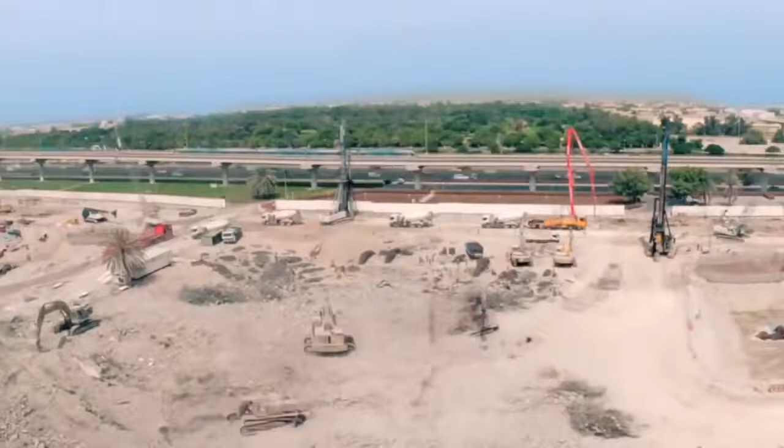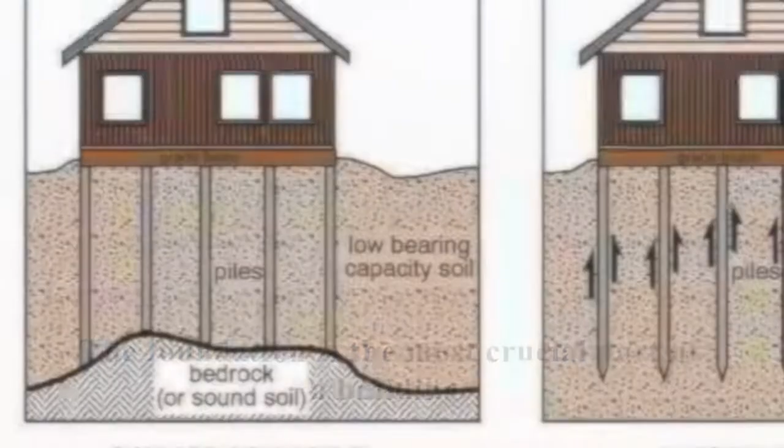The foundation is the most crucial part of a building. This structure determines the stability and safety of the building. In this video, bored cast in situ pile foundation is used.

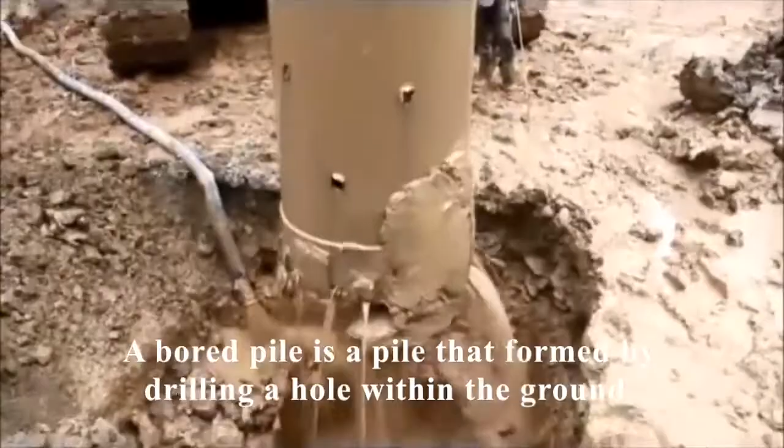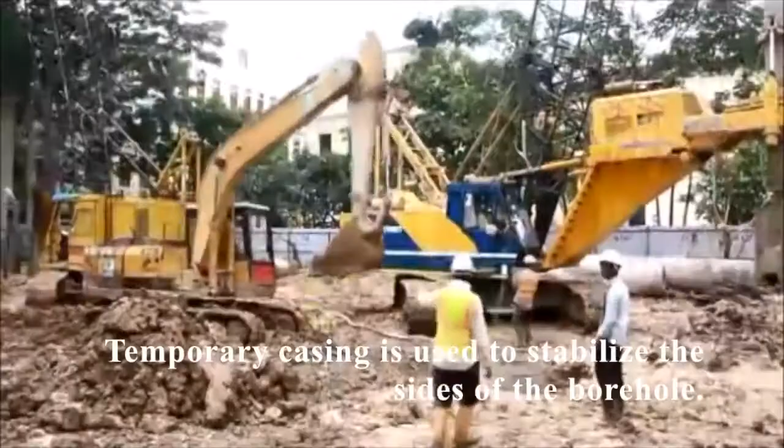A bored pile is a pile that is formed by drilling a hole in the ground with the use of a temporary casing and subsequently filling it with cast in situ concrete. The temporary casing is used to stabilize the sides of the borehole, and the casing is withdrawn once concreting is complete.

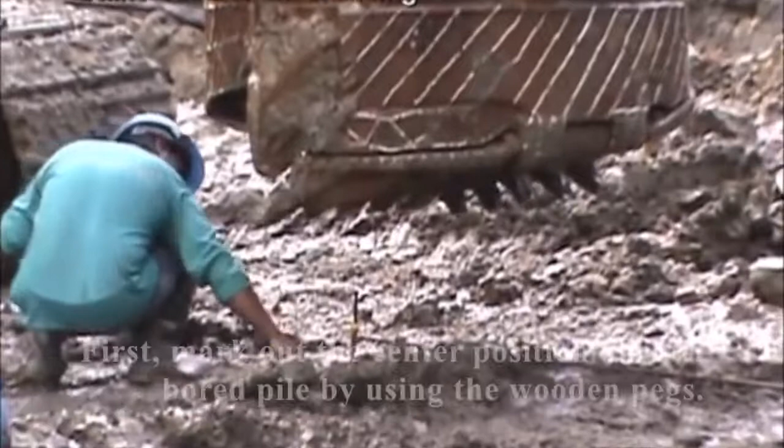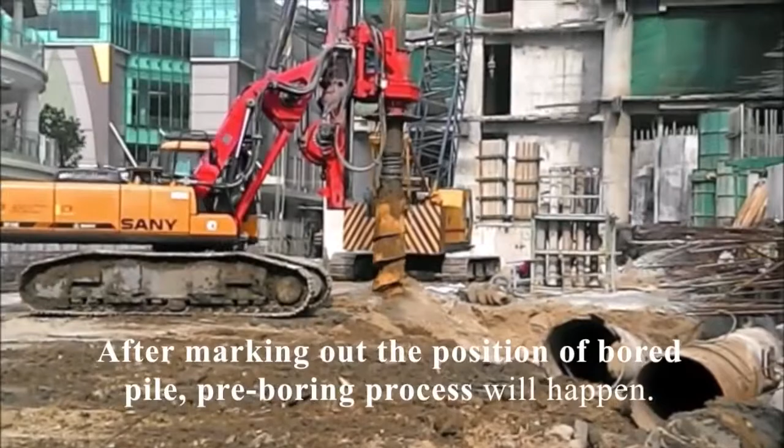Step 1. First, mark out the center position of each bored pile by using wooden pegs. Stage 2 is the pre-boring stage. After marking out the position of the bored pile, the pre-boring process will occur. In this video, we can see that an auger is being used in the pre-boring process.

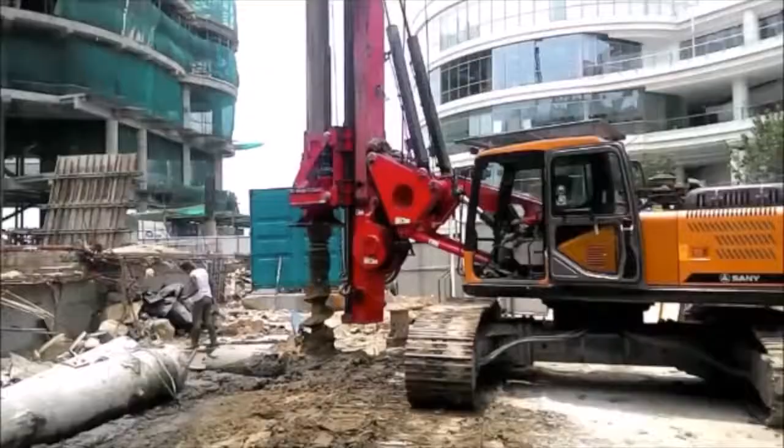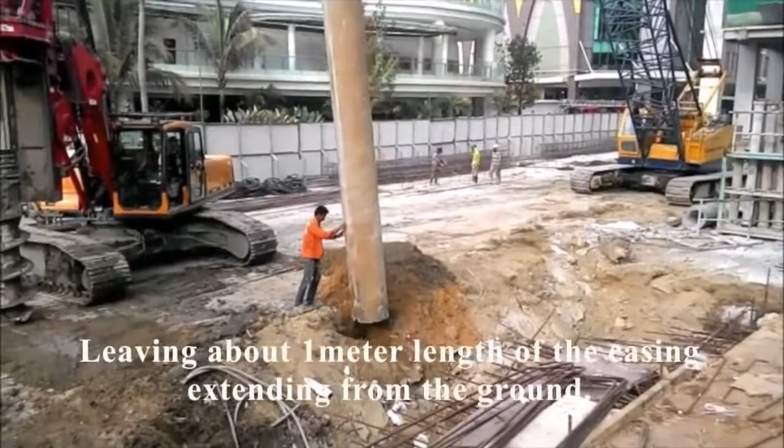Step 3 is the installation of temporary casing stage. The temporary casing will be driven into the borehole by using the vibratory hammer, leaving about 1 meter length of the casing extending from the ground.

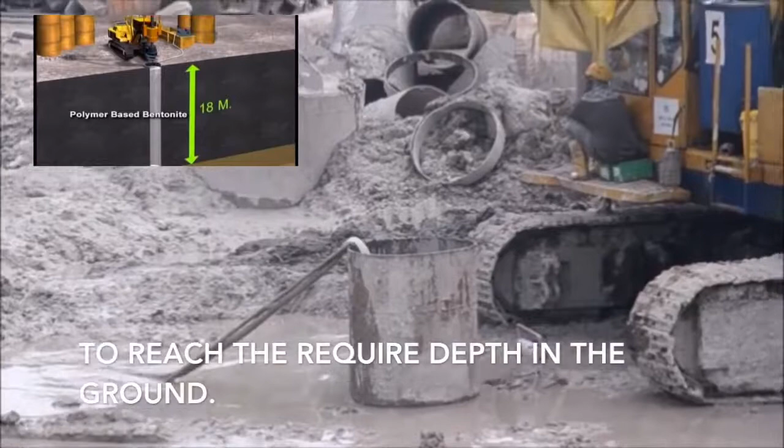In this video, we can see that the workers are cutting the extra casing. In some cases, the casing is not long enough to reach the required depth in the ground, so bentonite slurry is used to support the soil below the casing.

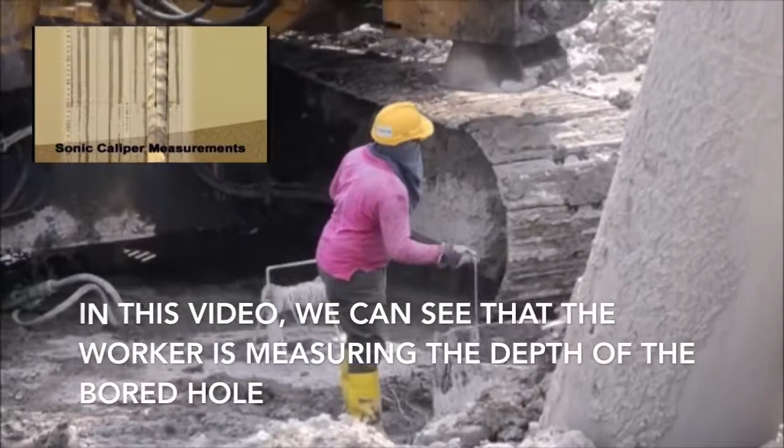In this video, we can see that the worker is measuring the depth of the borehole by using sonic caliper measurement.

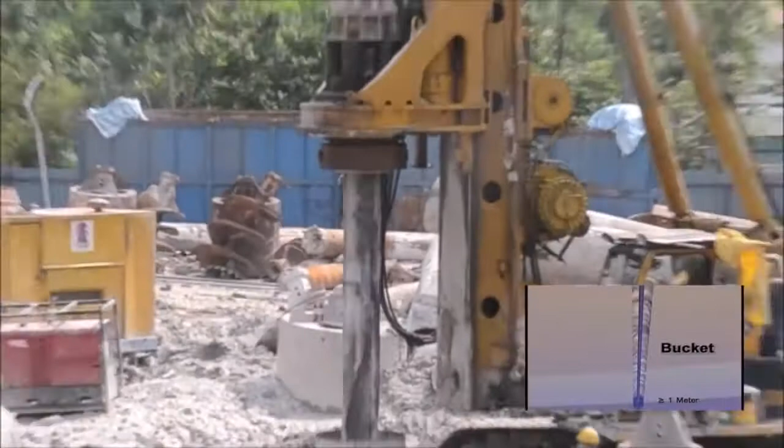Stage 4 is the installation of the reinforcement cage, where a crane will be used to lift up the prefabricated reinforcement cage from the reinforcement yard, and it will be transferred to the borehole. The crane will lower and place the reinforcement cage within the borehole.

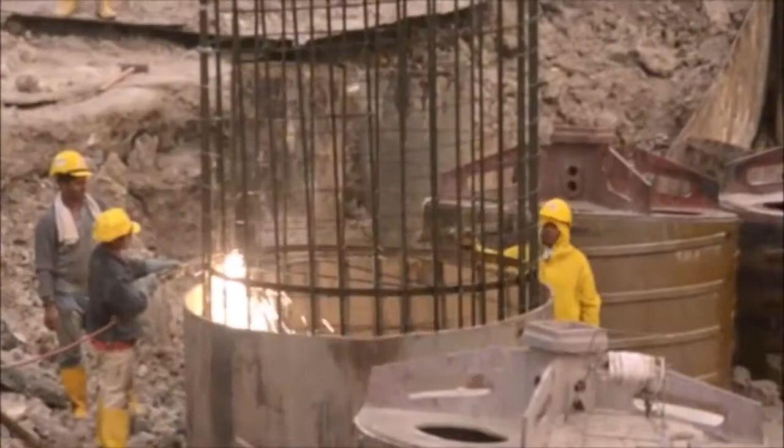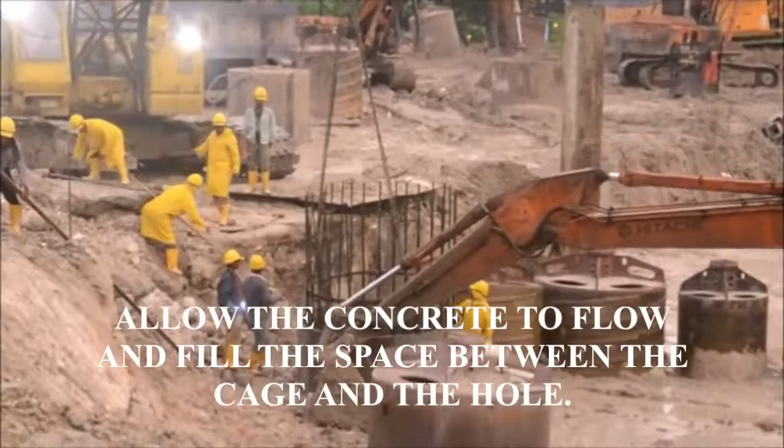Spacers can be seen around the reinforcement cage. This is to allow the concrete to flow and fill the space between the cage and the hole. When the concrete has reached the top of the borehole, the tremie pipe will be withdrawn completely.

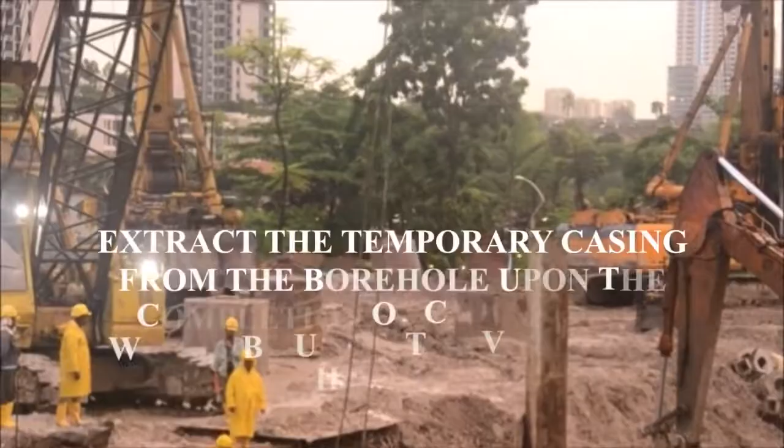Step 6 is the extraction of the temporary casing. Extract the temporary casing from the borehole upon the completion of concreting work by using the vibratory hammer. Also ensure that the temporary casing is extracted vertically.

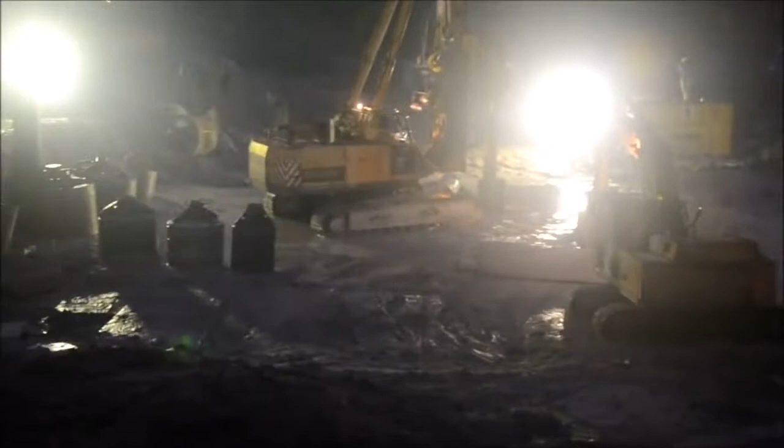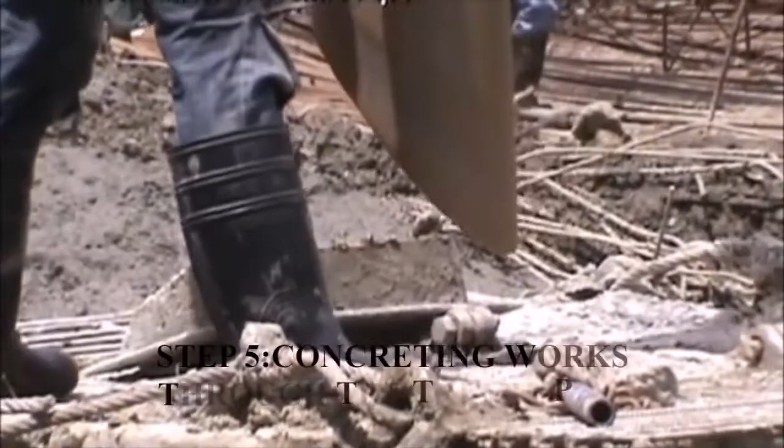While waiting for the concrete truck to arrive, the excavator will make a pathway for the truck to enter. Step 5 is the concrete work through the tremie pipe. After placing the rebar cage, insert the tremie pipe to the toe of the borehole.

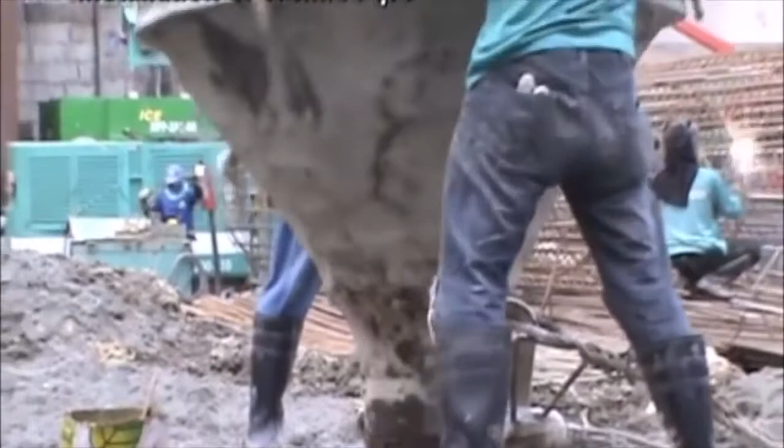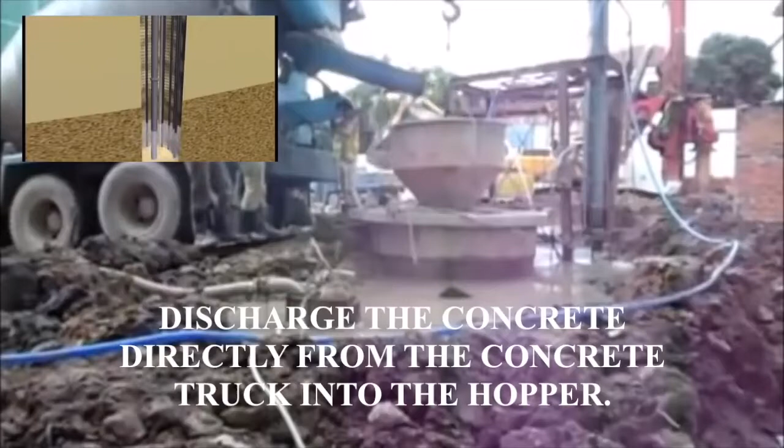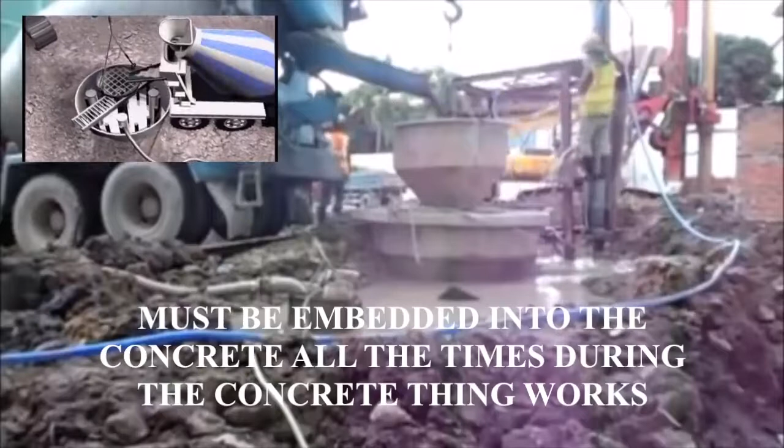Then discharge the concrete directly from the concrete truck into the hopper. Later on, fill the concrete from the bottom of the borehole to the top to form the bored pile. To prevent necking of the bored pile, the tremie pipe must be embedded into the concrete at all times during the concreting work.

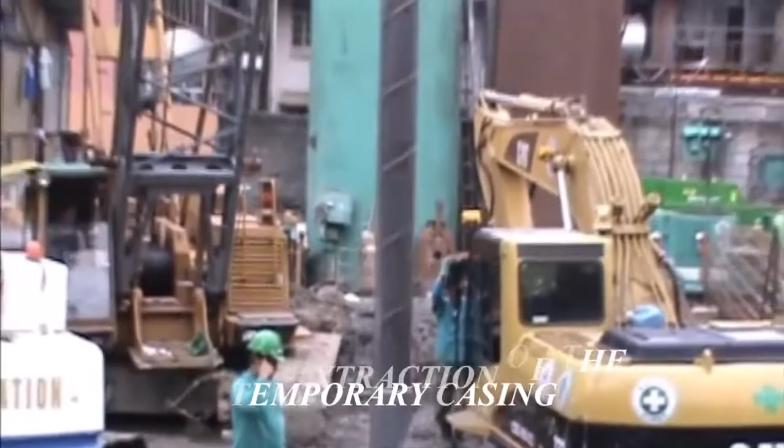Step 6 is the extraction of the temporary casing. Extract the temporary casing from the borehole upon the completion of concreting work by using the vibratory hammer. Also ensure that the temporary casing is extracted vertically.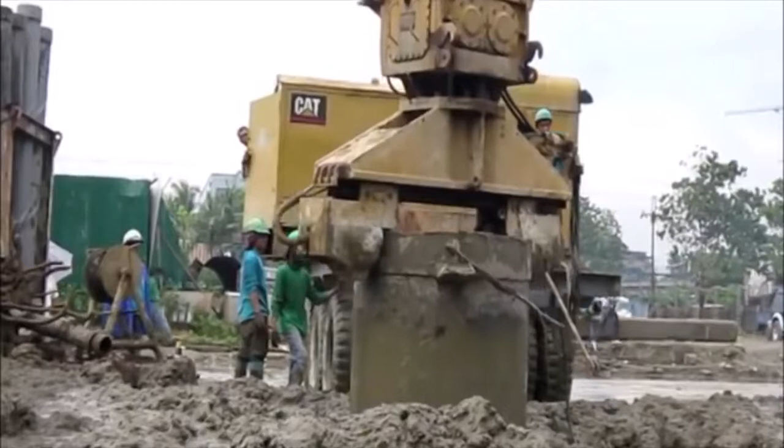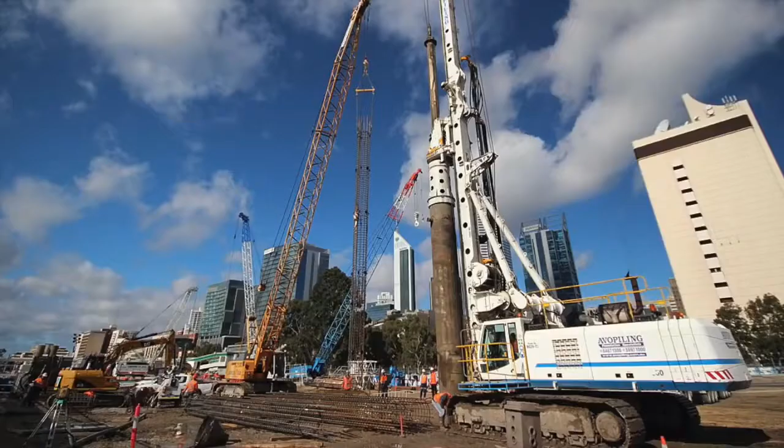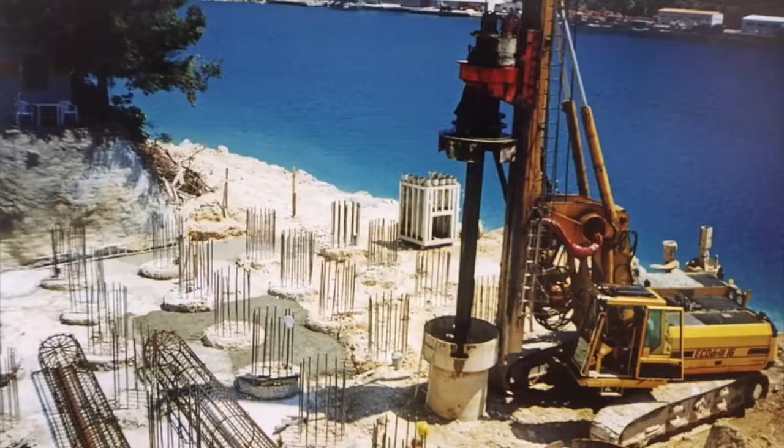There are several advantages to constructing a bored cast in situ pile. It can be constructed immediately, thus cutting out the time required for casting, maturing, and delivering precast piles. Any size and length of pile can be constructed at the site. Most obstructions can be hammered and broken through by the pile driving techniques.

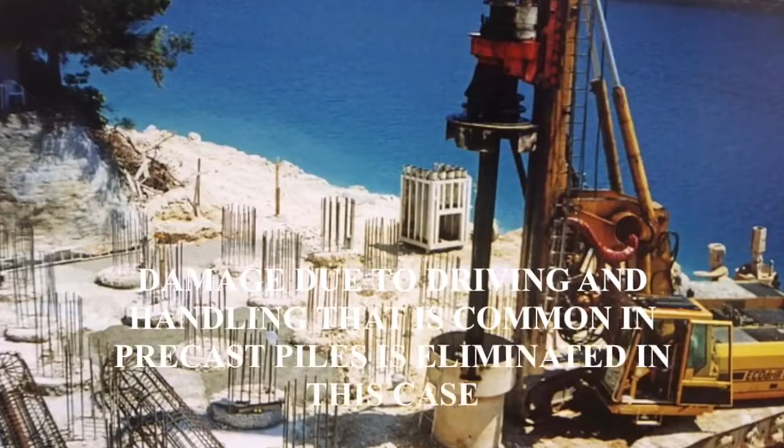Damage due to driving and handling that is common in precast piles is eliminated in this case. It is suitable in soils of poor drainage qualities, since cast in situ piles do not significantly disturb the surrounding soil.

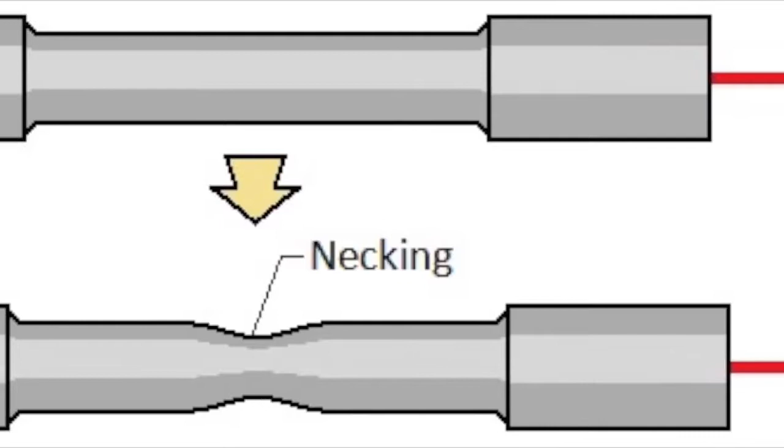On the other hand, the disadvantages of bored cast in situ piles are: it can be difficult to place and ensure positioning of any necessary reinforcement. The concrete quality control is more difficult. Moreover, there is a danger of necking from lateral earth pressure.

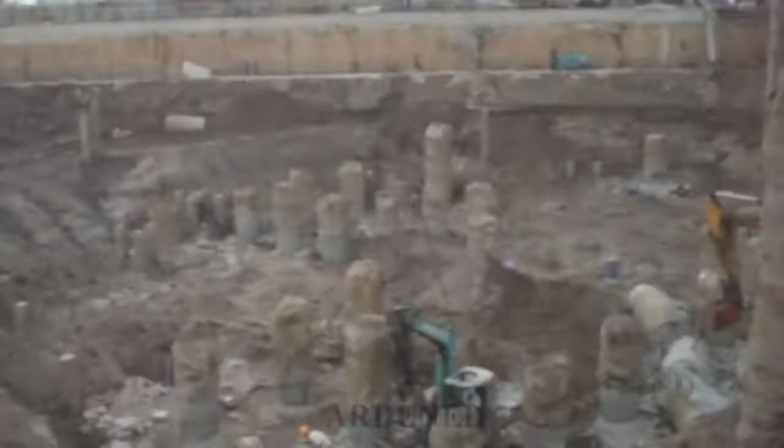Young concrete is susceptible to attack from some soil chemicals before it has set and hardened. Lastly, the construction of piles in holes where there are heavy currents of groundwater flow or artesian pressure is very difficult.

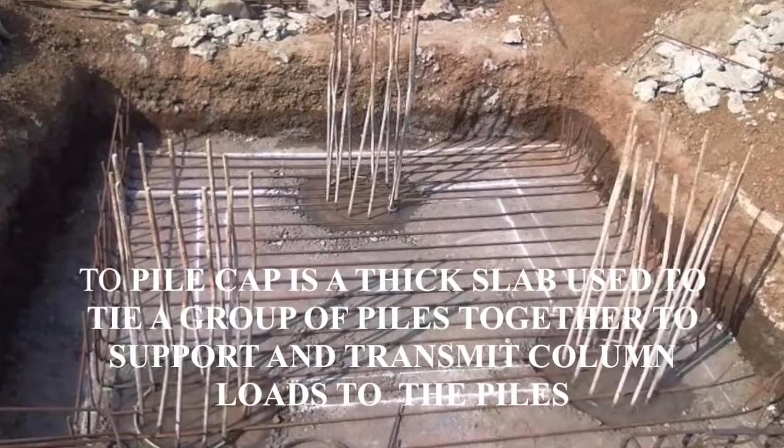After the piling process has been performed, the pile cap will be built on it. A pile cap is a thick slab used to tie a group of piles together to support and transmit column loads to the piles. Besides, the pile cap can stabilize individual piles, thus increasing overall stability of the group.

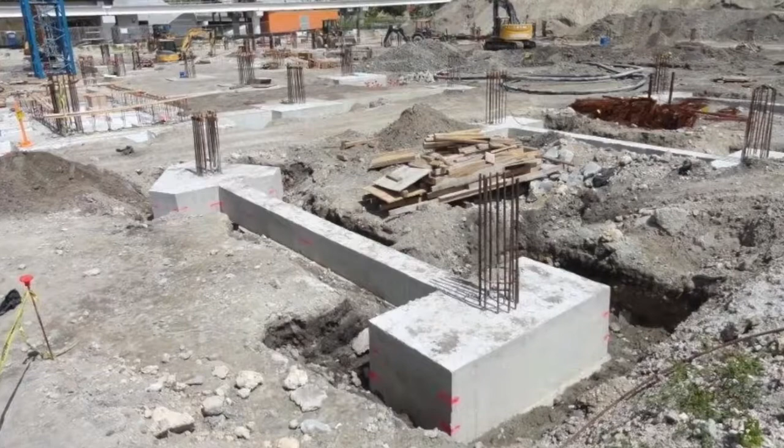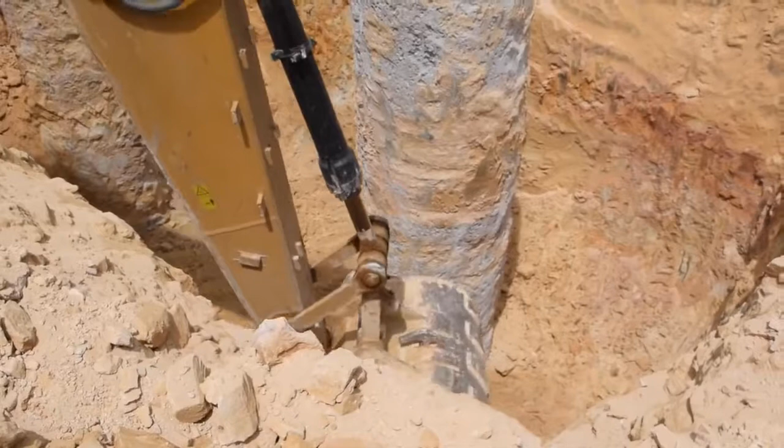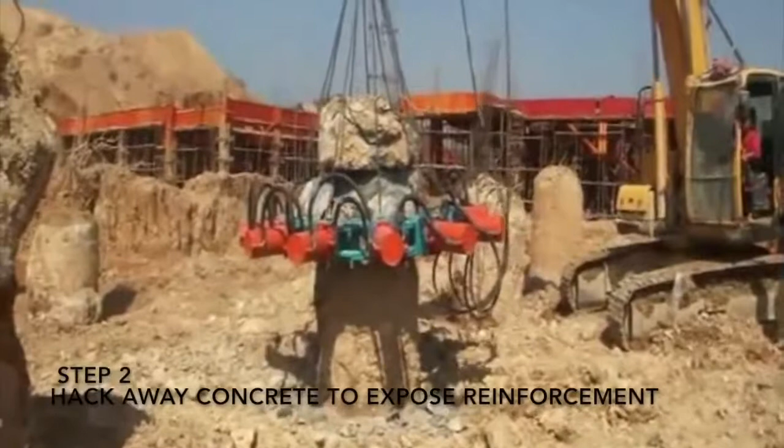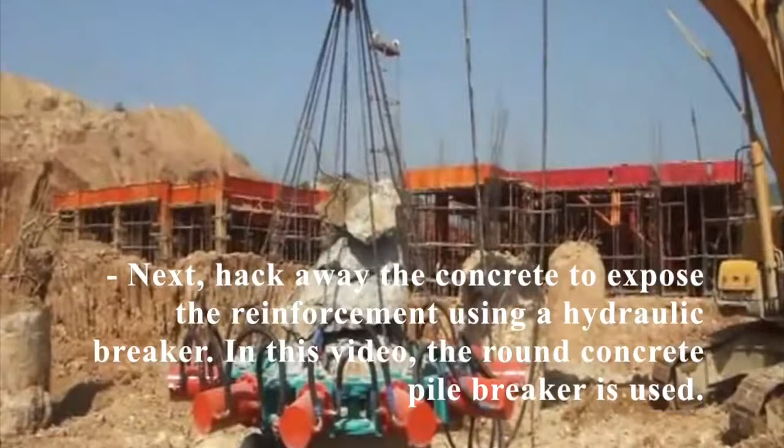First, an excavator is used to excavate the soil around the piles to level the pile cap base. Next, hack away the concrete to expose the reinforcement using a hydraulic breaker. In this video, the round concrete pile breaker is used.

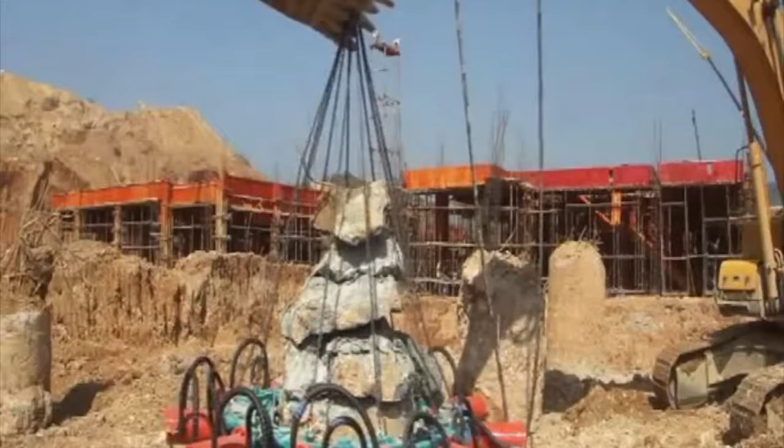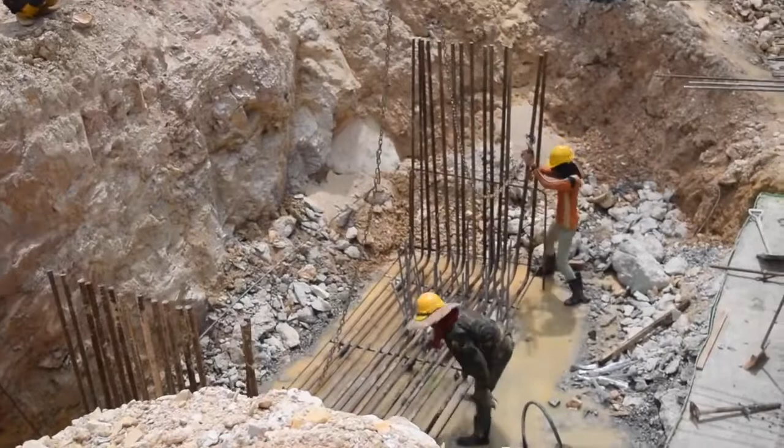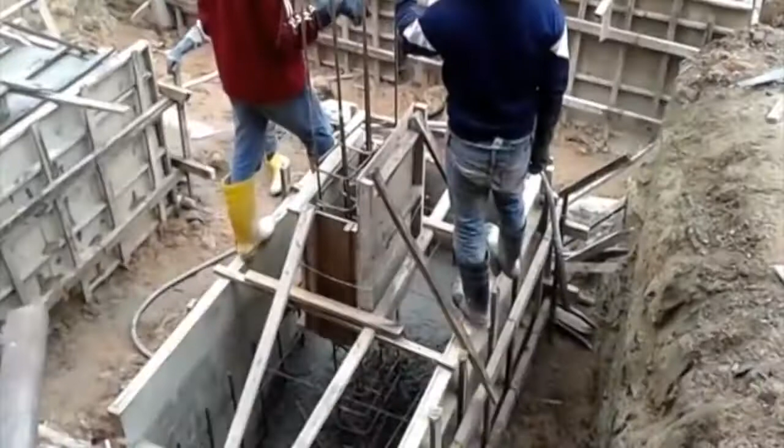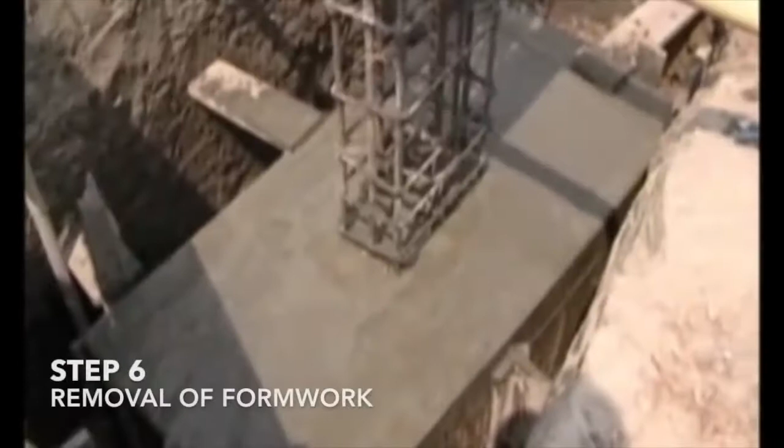After that, place the reinforcement bars of the pile cap onto the hacked bored piles. Formwork is then installed to cast the pile cap. Next, the concrete is poured inside the formwork. After the concrete is hardened, the formwork is removed. Finally, the pile foundation is done.

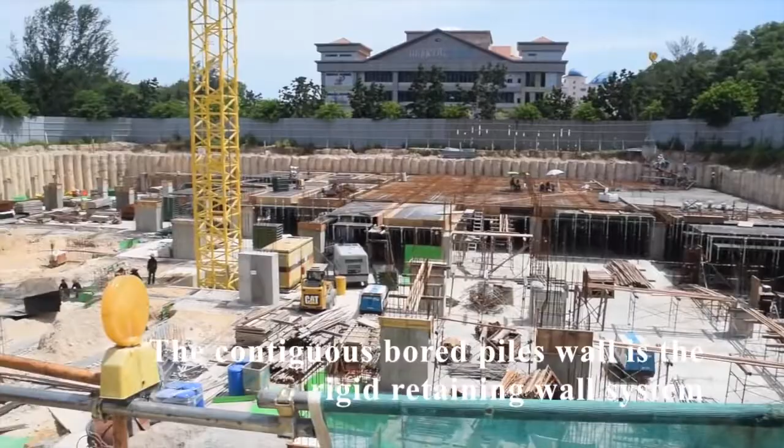Do you know that bored piles can not only be used as piling in pile foundations, but can also be built as a retaining wall, which is the contiguous bored pile wall. The contiguous bored pile wall is a rigid retaining wall system. It can act as a temporary earth retaining wall during excavation and can also be used as the permanent basement wall of the building.

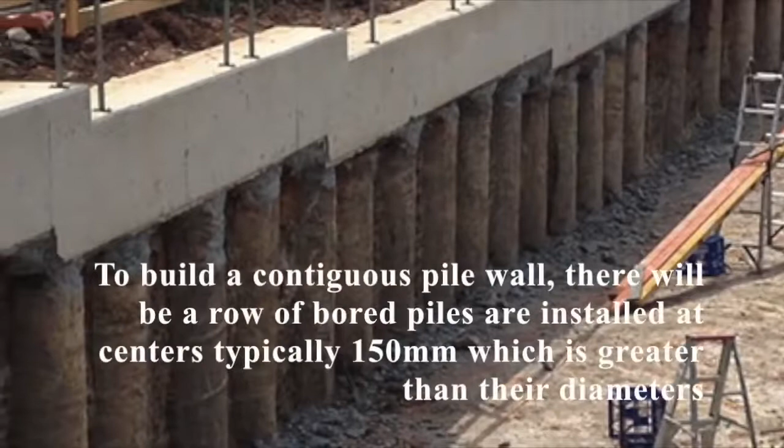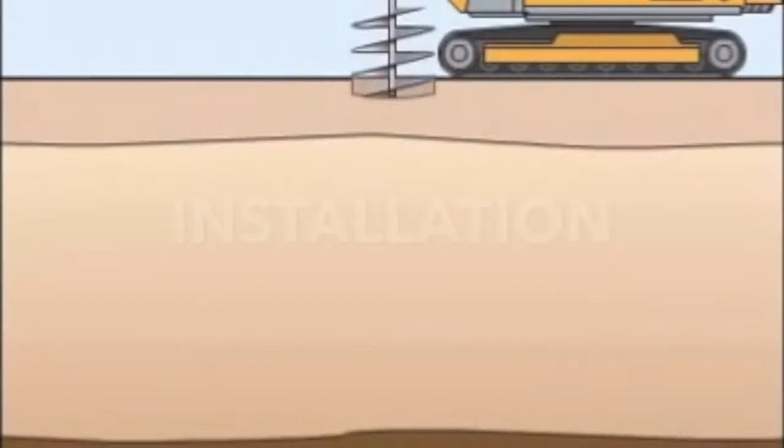To build a contiguous pile wall, a row of bored piles is installed at centers typically 150 mm greater than their diameters. The installation process of the contiguous bored pile wall is to repeat steps 1 to 6 from the installation of the bored cast in situ pile until the entire length of the contiguous bored pile wall construction is completed.

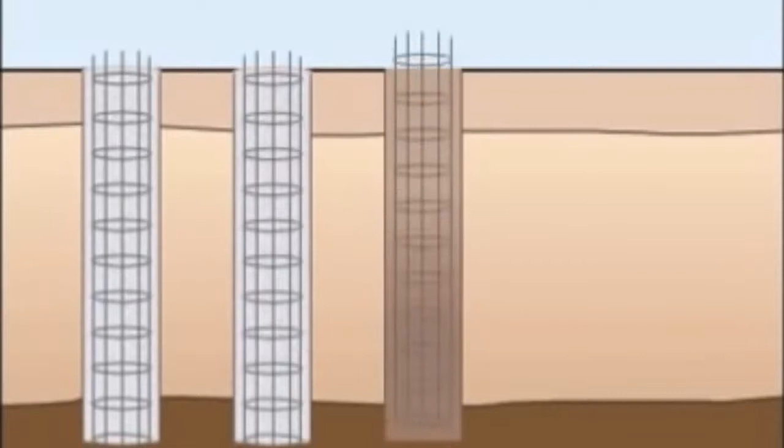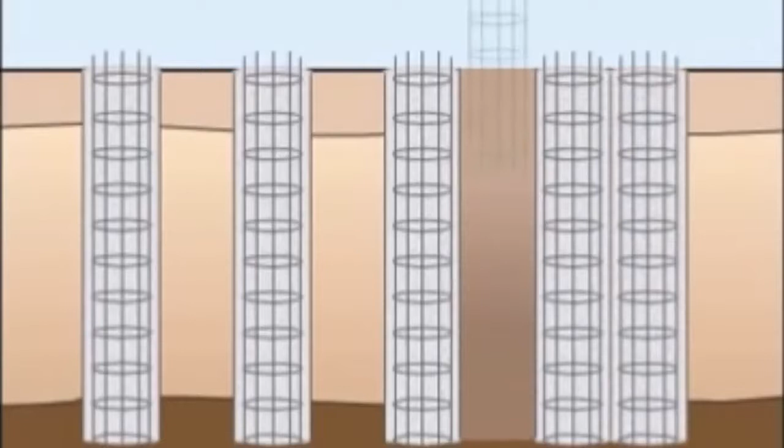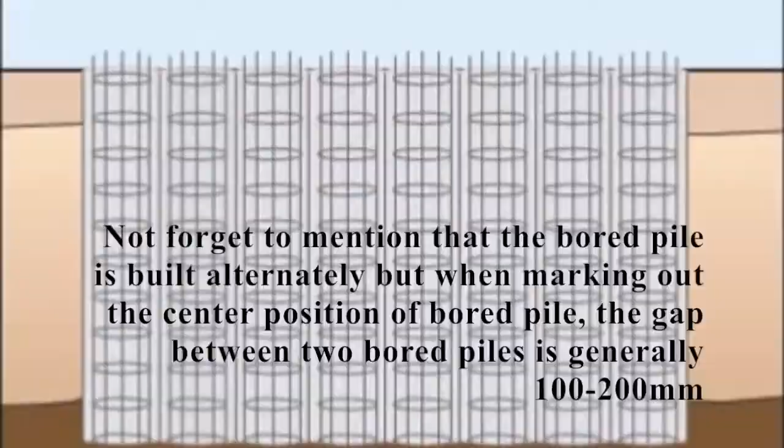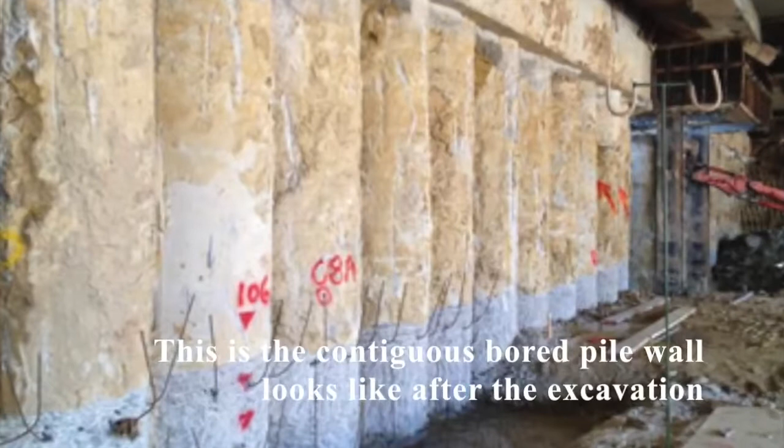Not to forget to mention that the bored piles are built alternately by marking out the center position of each bored pile. The gap between two bored piles is generally 100 to 200 mm. This is what the contiguous bored pile wall looks like after the excavation. From this picture, we can see that there is a cap beam cast on top of all the bored piles to tie them together.

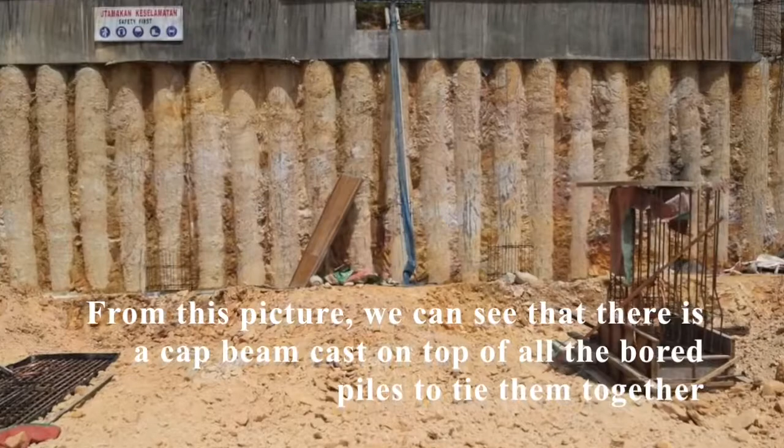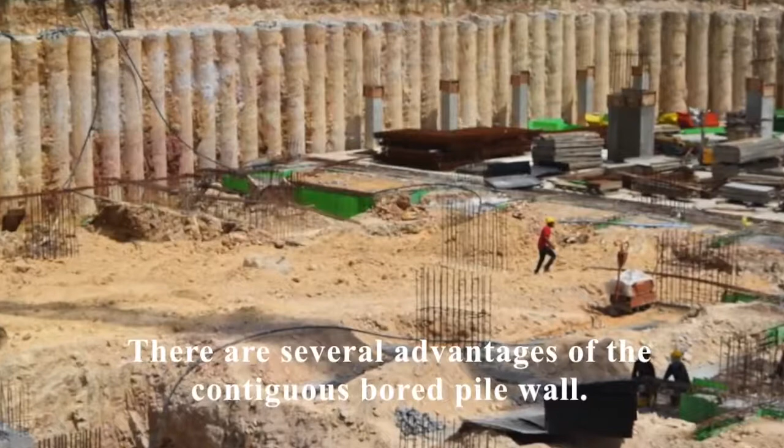There are several advantages of the contiguous bored pile wall. First, it is efficient and economical for constructing temporary or permanent retaining walls where drilling conditions are conducive. Next, its installation process is clean and comparatively quiet, with a low level of vibration during pile installation. For small excavation depths, it is able to minimize the distance between the wall and existing walls.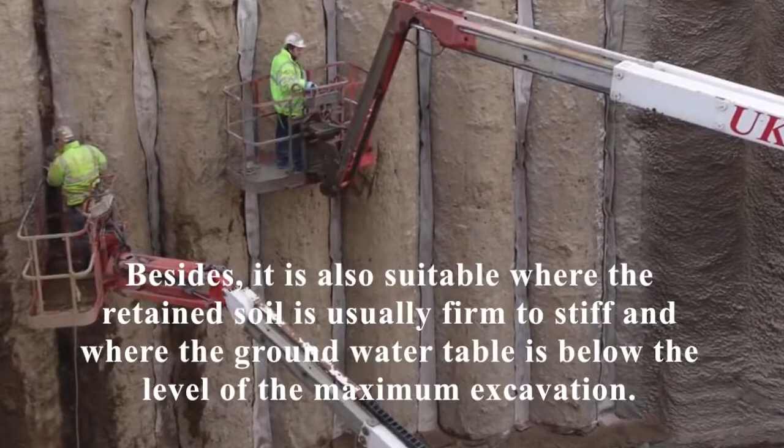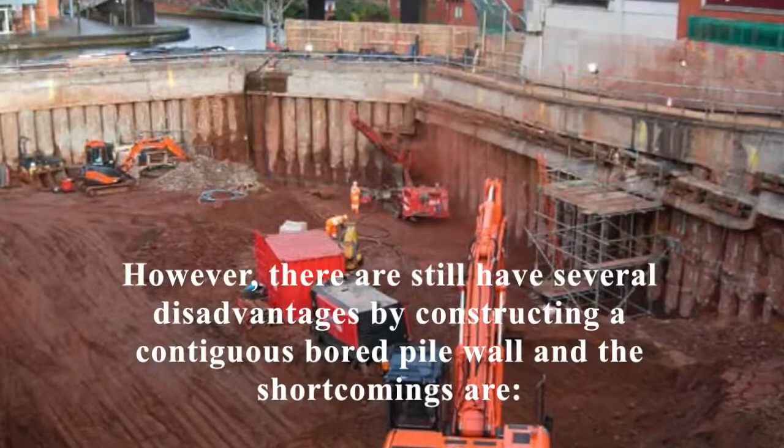It is also suitable where the retained soil is usually firm to stiff and where the groundwater table is below the level of the maximum excavation. However, there are still several disadvantages to constructing a contiguous bored pile wall. The shortcomings are the risk of groundwater ingress between the piles if the gaps between the bored piles are not sealed with mortar.

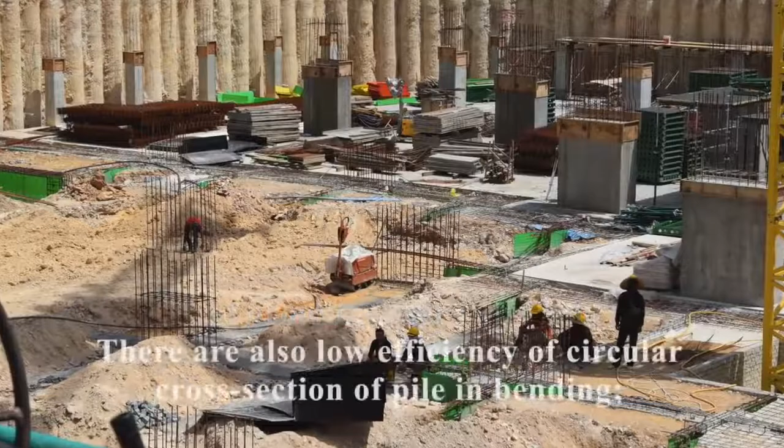There is also the low efficiency of the circular cross-section of the pile in bending. Next, where independent lining is not needed, there is the extent of additional works needed to form an acceptable surface to the wall.